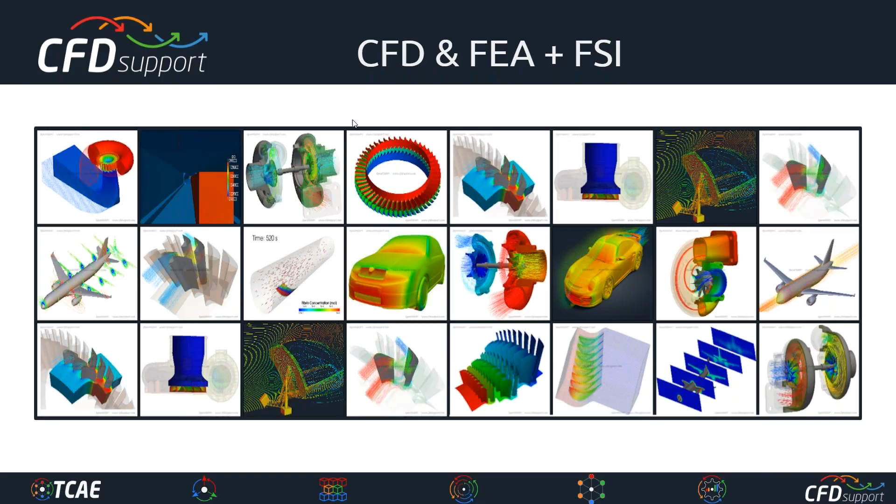Especially we believe in a combination of open source and professional support. So far we have invested more than 30 man-years of focused team development on top of open source to deliver professional simulation tools like this, and that's why we are being picked, and we'll be happy to show you in today's webinar. We have a very strong team of developers, and in TCAE, we have successfully merged the benefits of open source with the benefits of commercial codes. Due to the open source nature of the code, the code is unlimited, it's extremely flexible, and due to the commercial code nature, TCAE has a graphical interface, professional technical support, it's robust, it's accurate, it's automated, it's well tested, and ready for use in the industry.

TCAE consists of software modules that can be combined according to project needs. You can view them as independent standalone tools which together make a complex workflow, but you can use just one of them, all of them, or any combination.

TCAE has a modular character. That means the user can choose between TCAE modules if needed and combine them with many other software pieces available in the market, so the total number of combinations is almost infinite.

TCAE has strong integration ability. It has been developed from the beginning in a way to fit any existing workflow, no matter if it's combined with commercial codes, in-house codes, or another open source code.

TCAE is very flexible because, as you know, in a typical enterprise the engineers usually have an existing workflow already, and TCAE is capable of fitting into it. No matter what design tool or simulation tool is used, TCAE is still here to fit into any workflow and do its job, delivering results for the user's judgment.

TCAE is very flexible. It's ready for very complex workflows, and we believe it's a modern code.

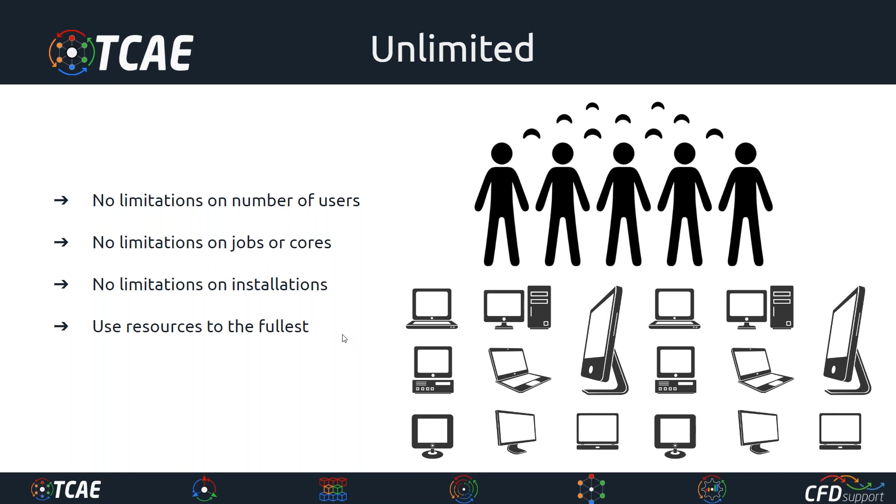TCAE is unlimited. It means there are no limitations on the number of users, and no limitations on the number of jobs and cores it's used with, no matter how many hardware installations are used. It can scale all the resources to the fullest, and it's very accurate.

It's our biggest priority to be accurate, to be focused. It's accurate because it's focused mainly on turbomachinery simulations and external aerodynamics. These are two fields we are focused on in a big way, I would say. It's definitely not a general purpose code, and we believe it's the experience and dedication which makes it accurate.

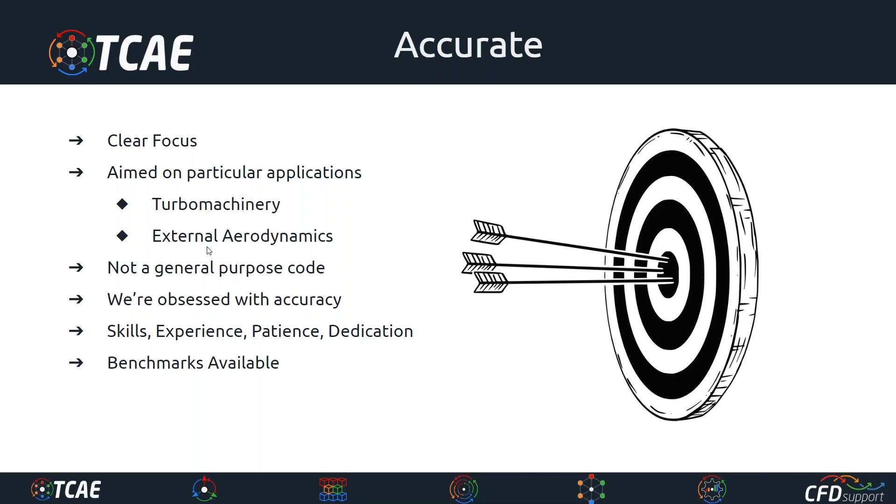It's perfectly automated, so it can be used as a black box or as a fully or highly sophisticated code. We believe we have good technical support.

It's created in parallel for Windows and for Linux, and of course natively compiled, and it can be used remotely or in batch mode.

The automated meshing system is included and available, and of course external meshes can be loaded. It's the user's decision.

There is very advanced post-processing, especially for turbomachinery. We have very good post-processing, a lot of features installed and developed, and we are happy to show you.

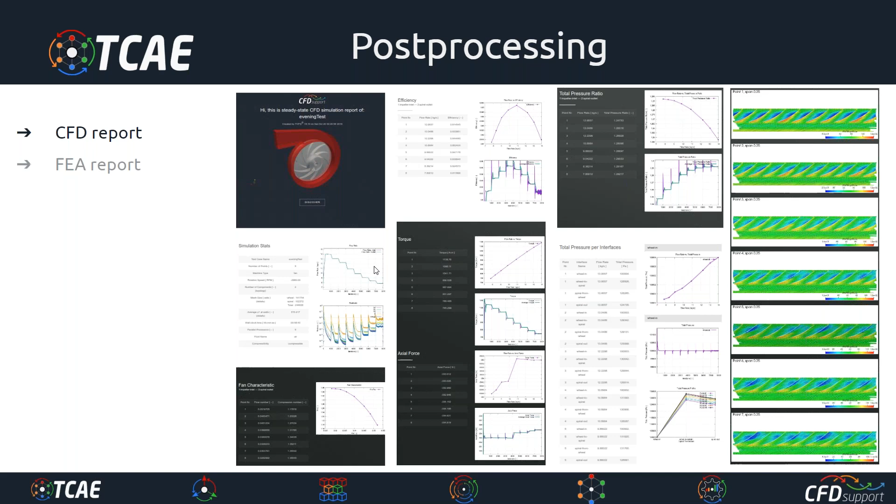We have continual development. As you know, the software is never finished, it's always in the development process. There are a lot of versions we have released, and there are a lot of versions we will release in the future.

It's user driven. The development is based on the users' requirements, which we gather together and pick the most important capabilities to implement for the next releases. We have a special system for the development.

Recently we released the new version in February, so it's not that new, but in February we released version 21.02. We are already in the full process of developing the next new version, which will be released in September. There will be a lot of interesting new capabilities, including again a better graphical interface.

There will be, for example, support for real gases. There will be extended support for heat transfer. There will be a much better CGNS library, export and import. And there will definitely be a big thing, a new module designed for optimization. I'm sure there will be a lot of information released later.

TCAE has always been best for turbomachinery applications like pumps, fans, hydro turbines, as you can see in today's webinar, and compressors, turbochargers, and all rotating equipment. It's also used in combinations of external aerodynamics and rotating machinery, like wind turbines, car bodies, or aircraft, various internal flows like hydraulic valves, exhaust and intake manifolds, ship propellers and hulls, drones, and even building wind loads, human comfort, and heat transfer.

There are a lot of benchmarks we've shown in the past to really prove TCAE is very accurate if it is used in a proper way.

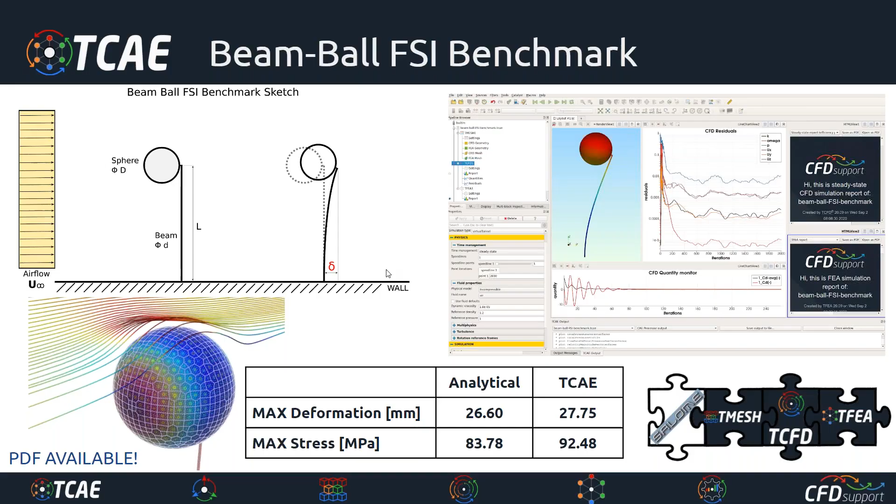Yes, just let me know if you can see my screen. Okay, so when we see it, I will tell you. So we can see it now. So I think you can start your part.

Thank you, Luboš, for handling the presentation. Today I will show you how to set up the Francis hydro turbine case. The case is available on our web pages, in the TCAE section, so you can download it and try it on your own. Today I will basically show you how to prepare a similar case for running CFD and FEA analysis from the existing STLs.

I will directly jump into the case setup. At the beginning we will have just the STLs, which have to be prepared and generated in a proper way. In several past webinars we have mentioned the properties and topology of component thinking, so I won't repeat this. We will directly take these STLs and use them for meshing, and then set up the CFD and FEA simulation.

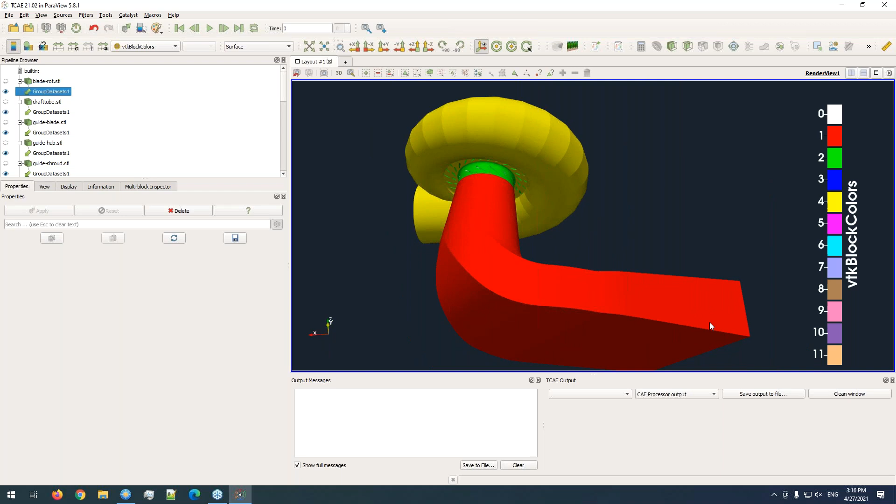This is the simulation domain. It has to be split into meaningful parts, which we call components. Usually we split the components into stator and rotor parts. Here we have at least 3 components: one including the spiral and the guide vanes, then an interface including the rotor part, and then a part which builds the draft tube. Each component needs to be waterproof or watertight—basically a closed domain—and the neighboring STLs fit perfectly between 2 neighboring components.

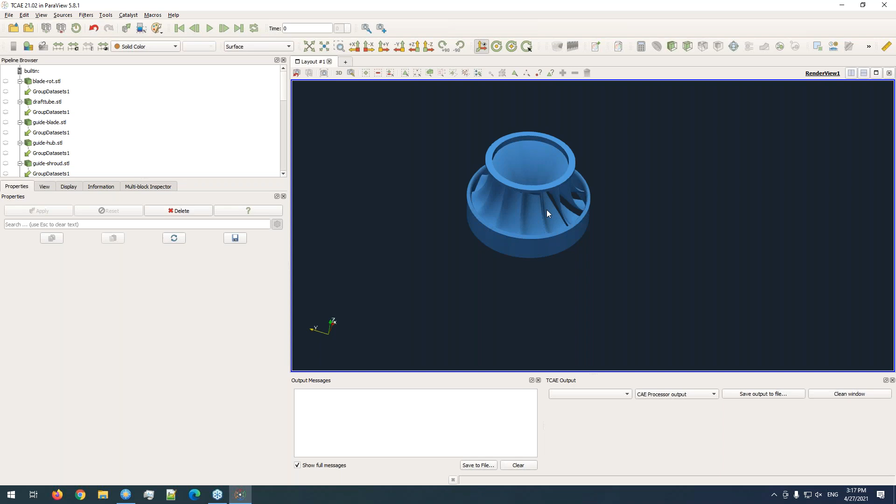If we would like to also do FEA analysis, we need a STL for the solid, which defines the impeller solid itself. So we need one STL for the whole impeller, which will be meshed in the T-mesh module, and then an FEA analysis can be set up for this mesh.

So basically we will be working with this. In general, the splitting of the STLs has to be done in a way that we can then exclusively define the boundaries and boundary conditions. We need to have inlets, outlets, rotating and non-rotating parts. That's basically all the input STLs have to satisfy.

Okay, so let's jump into TCAE. I'm now working in Windows, but a similar approach can be done on Linux machines. I will just click TCAE 21.02—we are using the latest version v2—and let's start.

If we open TCAE, we have the plain setup, and we will start step by step as a wizard, from T-mesh over TCFD setup and TFEA setup. At the moment I will switch off the TCFD and TFEA modules and go for the T-mesh module. First I will set up the CFD mesh, and afterwards I will also add the FEA mesh, then enable again the modules for CFD and FEA analysis.

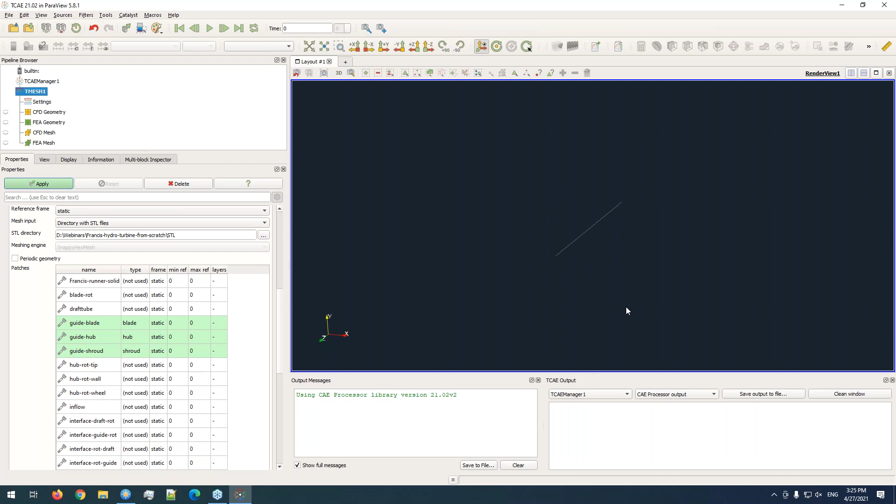Now I would like to see what I have enabled, so I can click apply, and my setup will appear in this render view. So this is my already defined names, defined parts.

And basically we can continue. So this is just hub, shroud, and blades. Then I think there is a part which is called spiral, which is the spiral itself, so I will set it as a standard wall part.

I think there is a little part here which connects the cutwater part and creates one of the blades here, and it is called spiral lip. So I can set it also, for example, as a wall.

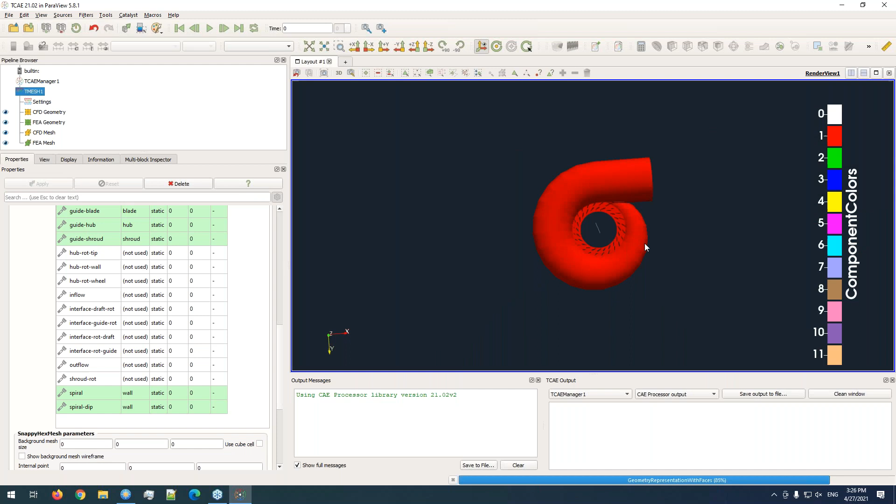And now, if you see it, it is already there. What I like also is that this geometry is saved or visualized by this item within the TMesh module, so you can anytime hide it or unhide it again, or visualize it. What I like is if you click this item and click display, you can make it an opacity to see what is inside.

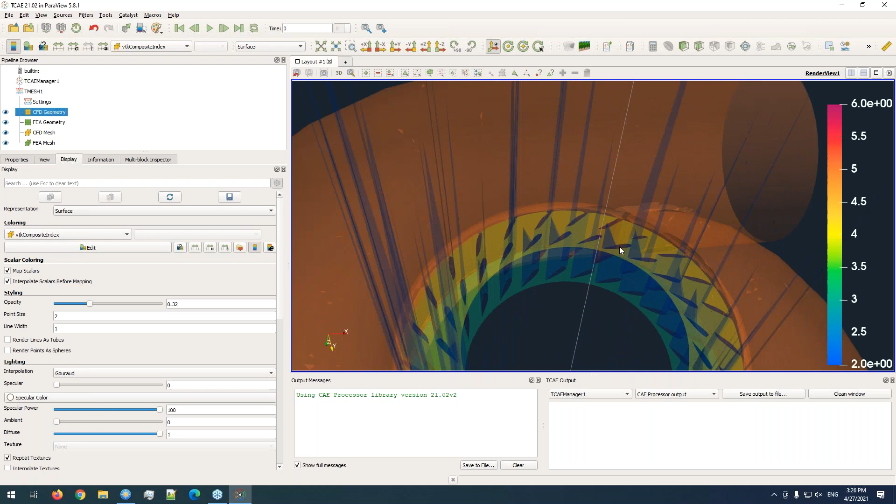The default coloring is that all boundaries owned by one component are colored with the same color. But if you switch to the VTK composite index, each boundary is visualized in a different color. This is also sometimes useful for setting each part.

What's also handy is if you apply a slice on the CFD geometry, you can set the properties in the properties menu. So I will make a slice just in the middle, and basically what you can see now is a contour. You can sometimes check if the contour is closed, which will show you if all the parts are set properly.

So it is also a good visualization for checking the current setup. In the display, you can set the line width to be thicker, which is a nice feature. You can change the coloring to component coloring and so on, so you can combine any ParaView features with the TCAE objects.

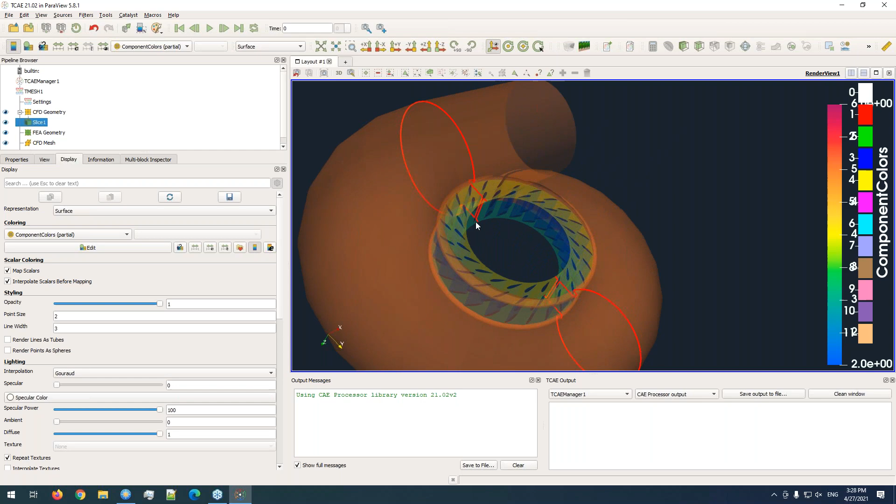What we can see is that the inlet and outlet are still missing, so let's go back and set the inlet. The inflow will be the inlet pressure. Okay, so this is the inlet, and the outlet is missing because it's an interface.

It is named like the interface, and the proper name is interface - this is the guide to rotor. So this will be the interface. There are three types of interfaces: inlet interface, outlet interface for cases where flow direction is known, and free stream interface where we don't know the direction of the flow.

For example, if you simulate an open impeller like a ship propeller, you need to enclose it into a cylinder to define a proper rotational part. On this single interface, because you don't know exactly where the flow goes in and out, you can set it as a free stream interface.

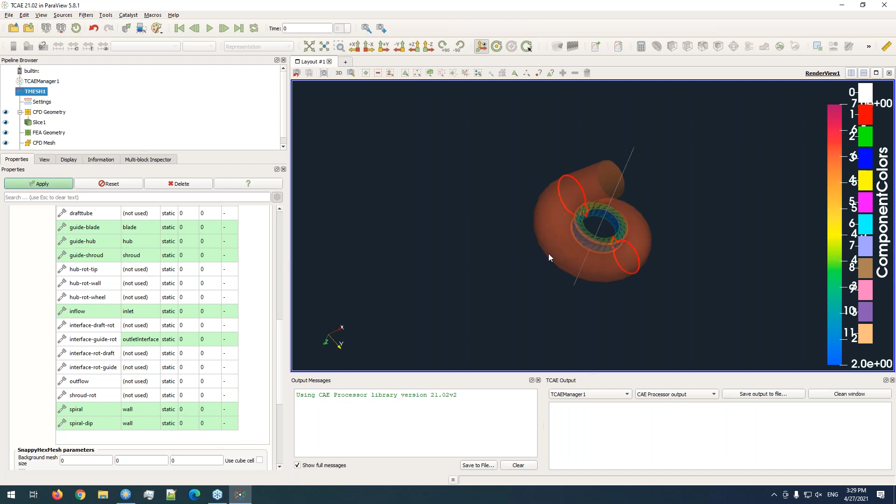But for this case, this is the outlet interface because this part creates the outlet from the guide or from the spiral part. If I enable it, I can see that this contour is closed, and I know that I also defined the inlet. So I think defining or enabling the proper patches is done for this component.

This also needs to be done for component 2 and component 3. So I will go back for the component coloring. Now everything is red, and I will be adding the second component, which is the impeller. I will load the same STL directory and now define the rotating part, the rotor part.

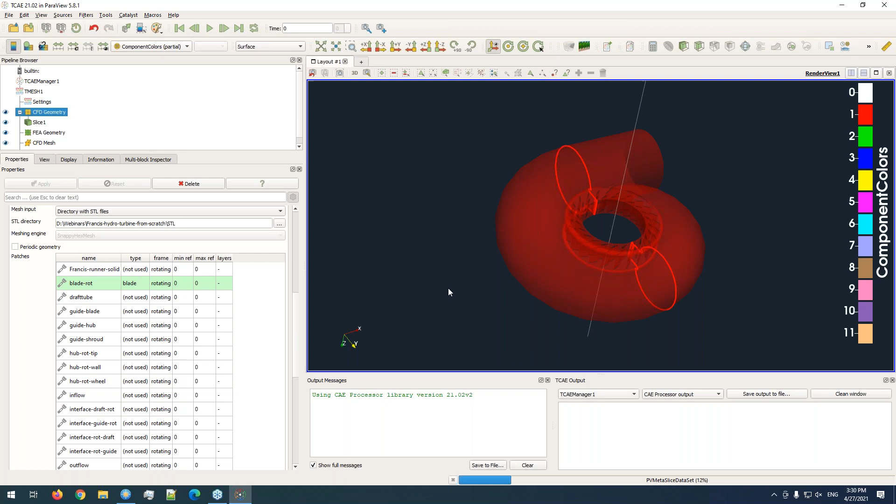Let's start with the blade. Blade rotation, blade rot, is the STL which includes information about the blade. So I will set it as a blade. If I click apply, you can see the blades.

Now is a good moment to mention that it's clever to save the current setup of TCAE onto your disk, to the proper project folder. I will put it into the same folder as the source STLs. So I'll go for webinar, Francis Turbine from scratch, and here I will save, for example, webinar setup.

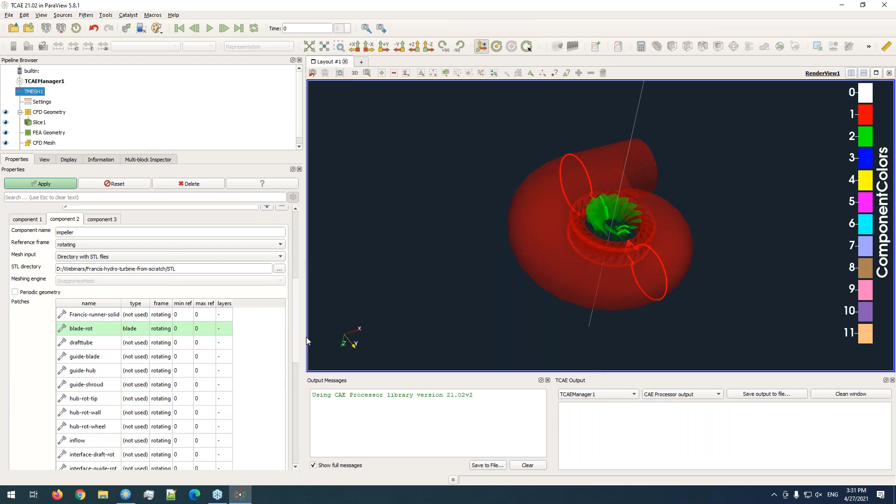Okay, so my current setup is now saved. If I lose something, I can reload my current setup anytime. So let's go to the T-Mesh part again, back, and let's finish the component 2 setup, or defining the boundaries.

So what is the rest? I think the hub is defined as these 3 STLs, so I will enable them as hub types. Setting the hub, apply. Okay, so this was the hub part.

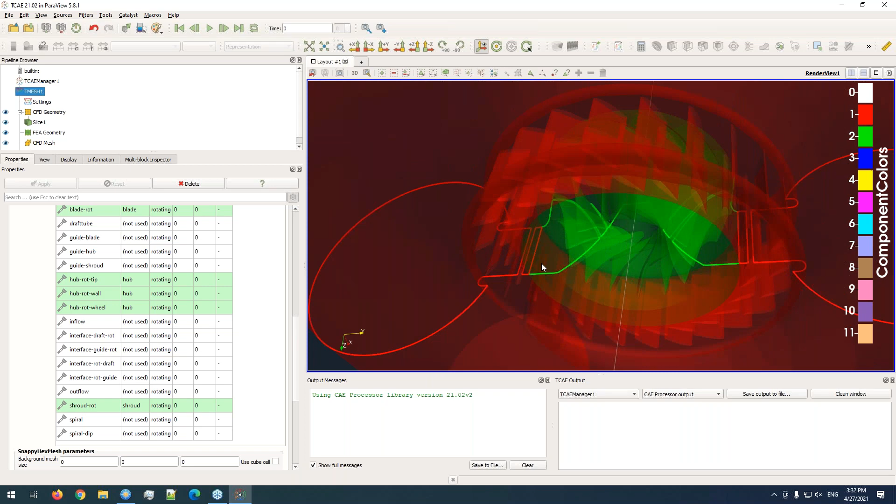I think shroud rotation, shroud rot, is the shroud part. When we focus more, yeah, I think hub and shroud are defined. So I think only two parts are left: the inlet into the rotor and the outlet from the rotor.

So here we have 2 interfaces, rotor to draft and rotor to guide. This is the inlet interface, and rotor to draft is definitely the outlet interface. So let's see if the contour is closed and if we can see all the patches. I think yes, everything is there.

So I think we are safe, yeah, and everything is correctly defined. And the last component, so again, load the STL folder and define the draft tube.

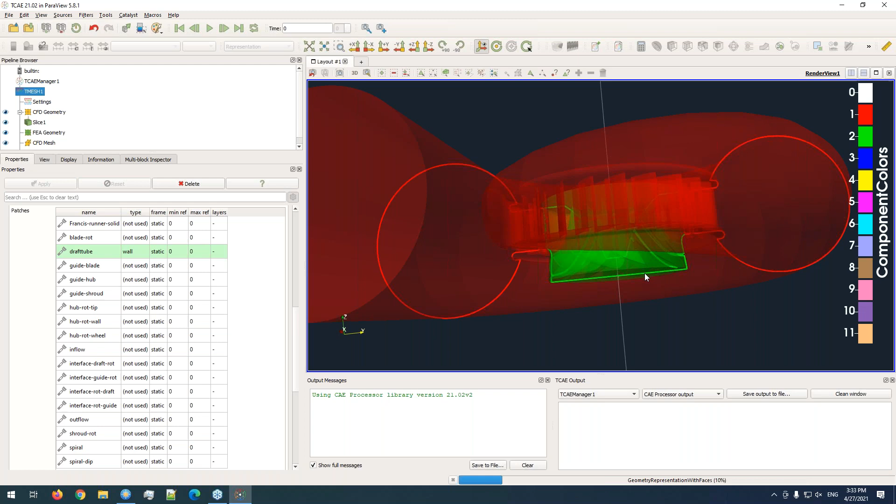So here we have just the draft tube wall, I think, so it will define the draft tube boundary. You can see nicely here, and then only the inlet and outlet. Here we have draft to rotor interface, so here it is an inlet interface, and the outflow is a physical outlet. So there is a simple type outlet to define the outlet.

All right, so here we have, I hope, correctly defined boundaries based on our input STLs. And now we need to set the meshing parameters. So let me save the current setup.

And now we need to set several parameters which define the mesh of the cell, the refinement. For the refinement, there are basically two main parameters: one is the overall cell size for the whole mesh, which is the definition of the largest cell in the domain, and then local refinement for each boundary.

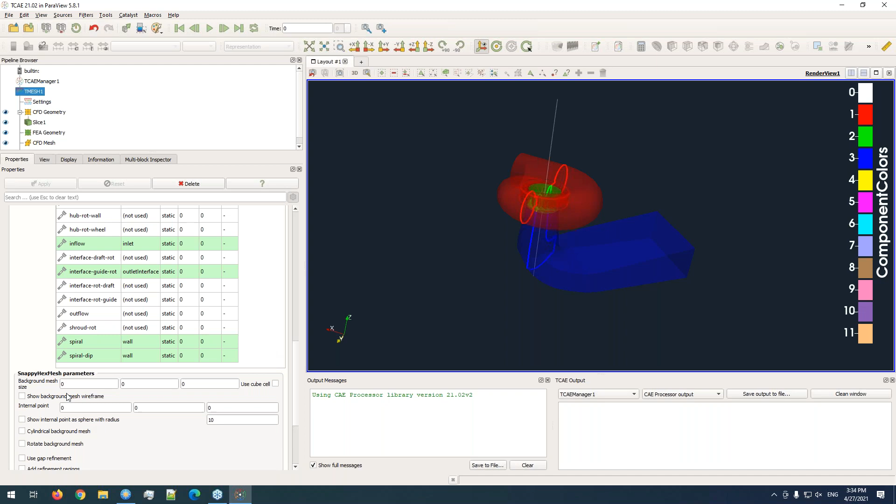So let's start with component 1 to show how it works. Usually you need to find the proper sizing of your cell. For this training purpose, we can go for a rougher mesh. If you start with new geometry, I always start with a rough mesh which nicely meshes your topology, your geometry. And then if everything is fine enough to follow the input geometry, you can start to refine the mesh, adding layers and so on, but only from the state when you are satisfied with the mesh, and then you can start to make the mesh finer.

So usually we start with a cube cell, same size in all directions, and I think a proper size mesh for this current setup, for this geometry, is something like 12 centimeters.

So if you would like to see how it looks, you can enable this show background mesh wireframe. You will see the topology, the sizing of the initial mesh with respect to your component and to your geometry.

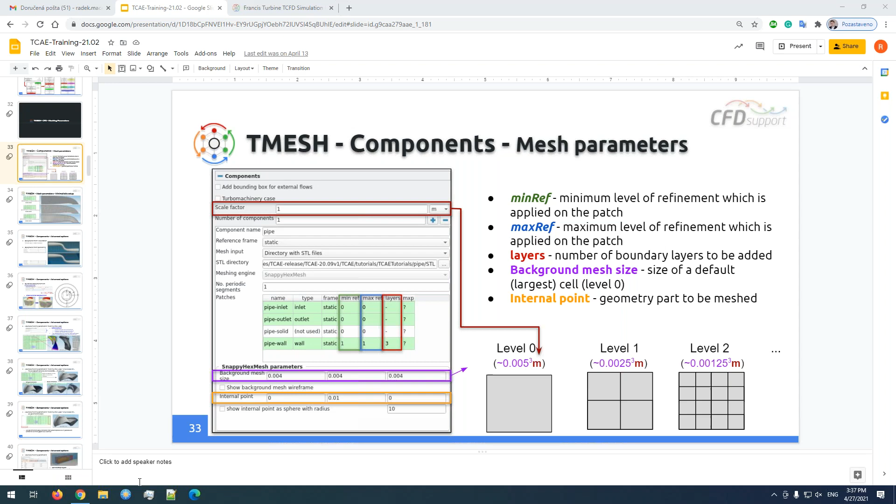All right, so let's go back to our setup. I will keep with this, and then we will define the parameters. So this will be our initial mesh. The internal point is very important, which defines which part of the mesh will be kept.

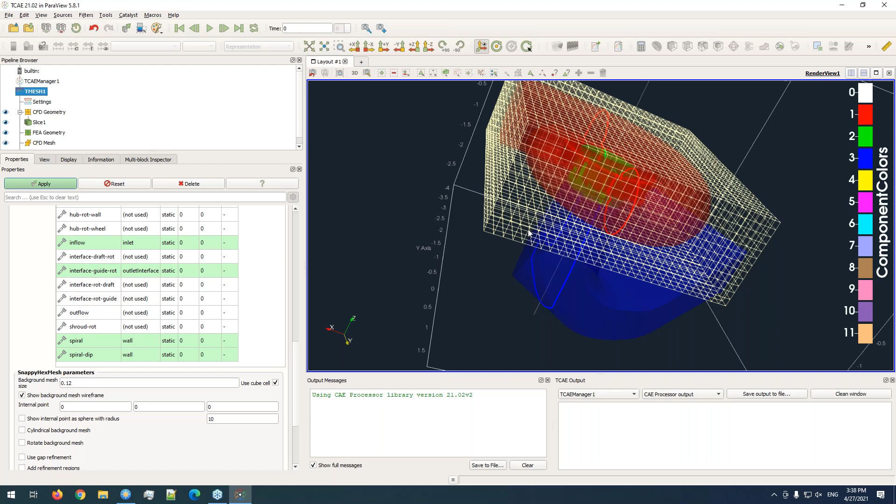So basically, as you can see, you have two options: you can mesh your object from the outside or from the inside. Therefore, you need to set a point within the background mesh which will define the part of the mesh to keep for the simulation or for the finalization of the mesh. So definitely we need to put this point inside.

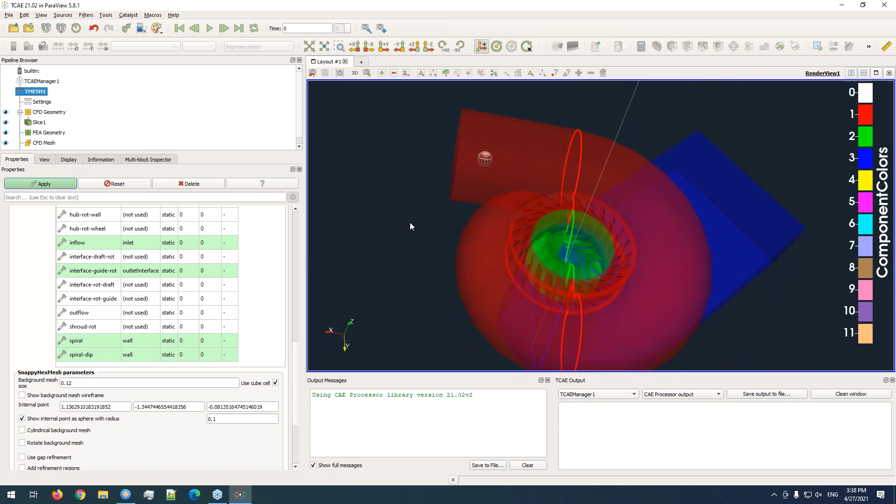So you can enable show internal point and place it manually into the spiral part. This radius is just for the visualization, used just for visualization. So we need to put this point inside the spiral. Okay, now we are satisfied.

And now it's time to set a local refinement. So usually some more detailed part has to be refined more, the important part has to be refined more, and less important, smoother parts can have a lower level of refinement, which is acceptable.

So let's start with an initial guess. Because the blades are pretty detailed compared to our initial background mesh size, I will set the level 3 for blades. Let's say for hub...

You can visualize each part if you double click it. So if I double click the hub, then the hub part is visualized, which is also a nice feature during this mesh setup. Then you can delete this highlighting by this icon.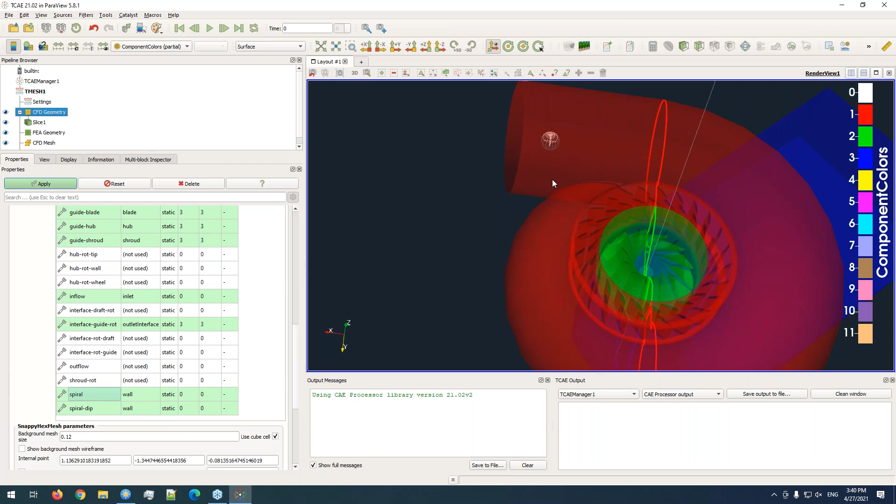The spiral is, I think, the biggest part of this, and it's both smooth but also detailed in this cutwater area. So we can set level 1 for the flat and not so detailed part, and level 3 for the more detailed part. This is done automatically based on the local curvature of the input geometry.

Spiral dip, I think, is the part of the cutwater which somehow creates one of the blades, so I will set the same level 3, 3. Usually if you set the homogeneous refinement, the same levels everywhere, it makes the best mesh, but sometimes it will require a lot of cells. So sometimes you need to set the level of refinement in different numbers for different boundary parts.

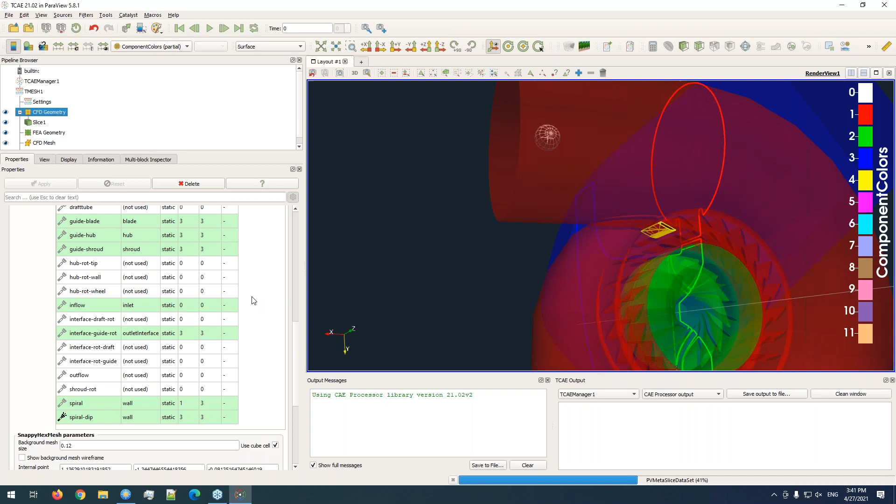Okay, so let's see what we have set. Now we can try to mesh this part. I will save it and click check setup, which is a good button that will show you if something is set correctly or not.

Now we can see an error message: all components of the background mesh size for component 2 must be greater than 0. This check always checks for the whole components, and until now we have set only the first component. So we can see that component 2 has a background mesh size of 0, which is not allowed.

So I will set for now the same sizing for the whole components, for all the components. It is 12 centimeters. Apply, and now I will try it again. Save and check. Okay, all right, very clever button.

I haven't connected the interfaces yet. Now we need to go back - we have defined 3 components and some interfaces, but we didn't define how these components are connected. For example, to see the topology of the mesh, there is a component map. If I double click, I can see it here. So we have 3 components, some with inlet, some with physical outlet, but there is no connection yet defined. This connection is done by clicking on the interface type.

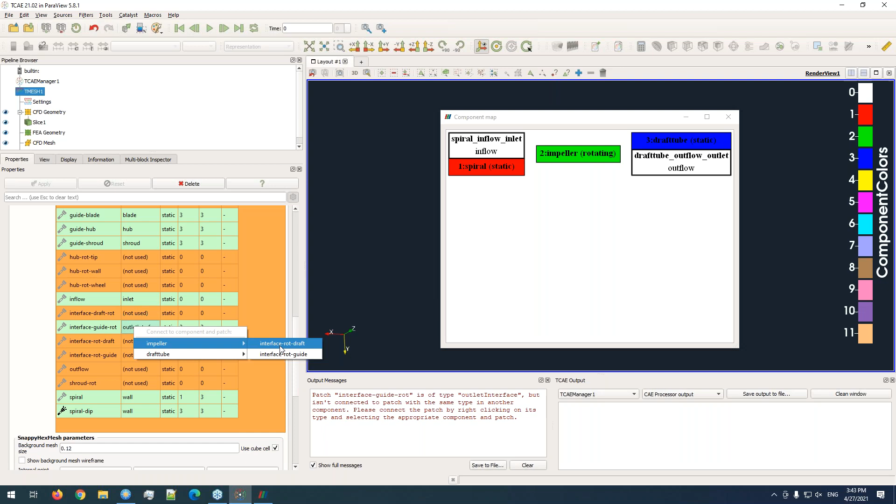If you right click this outlet interface, you have a menu using which you choose the neighboring interface and the neighboring component. So this outlet from the guide or from the spiral part has to be connected to the impeller part, and this connecting interface is rotor to guide, not rotor to draft. If we click it, now we can see a proper connection, and I need to do the same for the second couple of components connected, which is the impeller and draft tube part. So the rotor is connected, the outlet from the rotor is connected to the draft tube.

All right, so this is the connection. Now let me save it, check setup, perfect. Now case setup is okay, and now we can run the meshing for the first component.

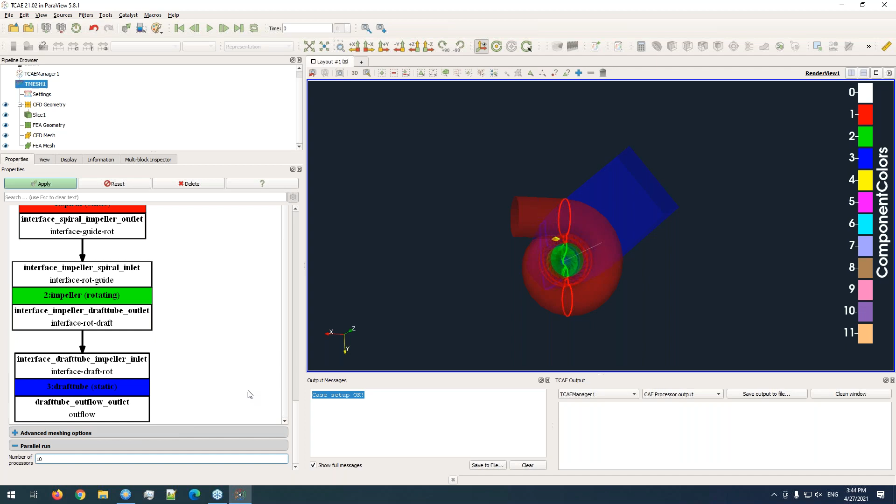Before I do that, I realized that I haven't set a proper number of processors. My computer has 10 processors, so I can use 10 processors for the meshing, which will also speed up the meshing process. So let me set this parameter.

So again, to be sure, I will save it. Now when we are simulating or running something, we need to first define the directory name in which my project or simulation will be stored. So let's say, I don't know, webinar case, for example. Apply. First I need to hit the write button because all the setup and hierarchy of the case is written down. And then I can run the meshing of the first component, the spiral component. So let me click it.

This is the output from the CAE processor, which is running behind, and it is telling you what it is doing at the moment. You can also switch to the solver output itself. So if you are familiar with SnappyHexMesh, then you can see the log of SnappyHexMesh here.

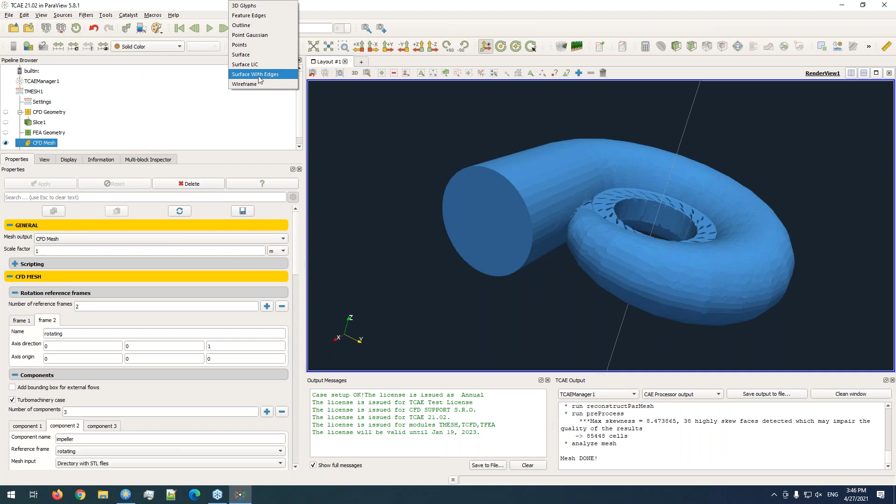So the mesh is done. You can visualize it with this show button. If I click it, the newly generated mesh will appear in the render view. This mesh is stored with this CFD mesh item, so I can get rid of the other items to just visualize the mesh. You can choose surface with edges to see the topology and check if everything is okay.

If we zoom a little bit, we can see there are several errors and flaws. For example, here we can see some cuts or distortion of the mesh. I think this is caused by insufficient refinement on the walls, and also the cells are too large to fully fill the gap between the guide blades and this outlet interface. Similarly, this cut water part also needs a higher level of refinement.

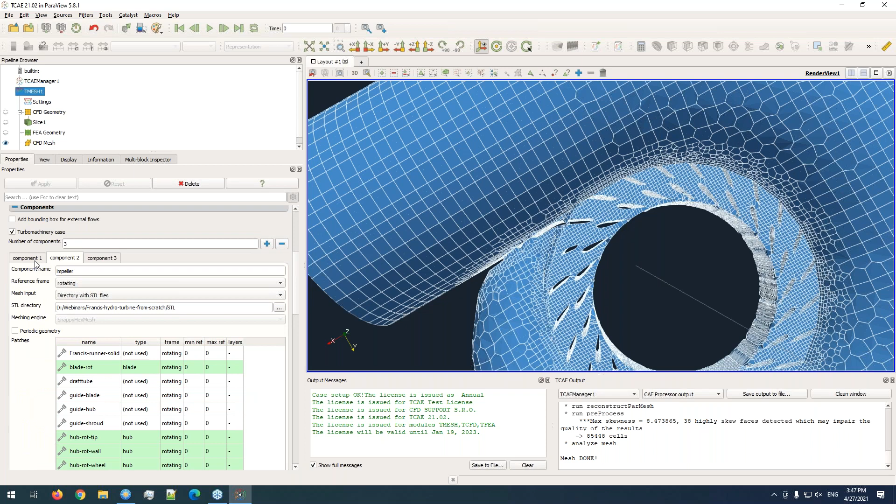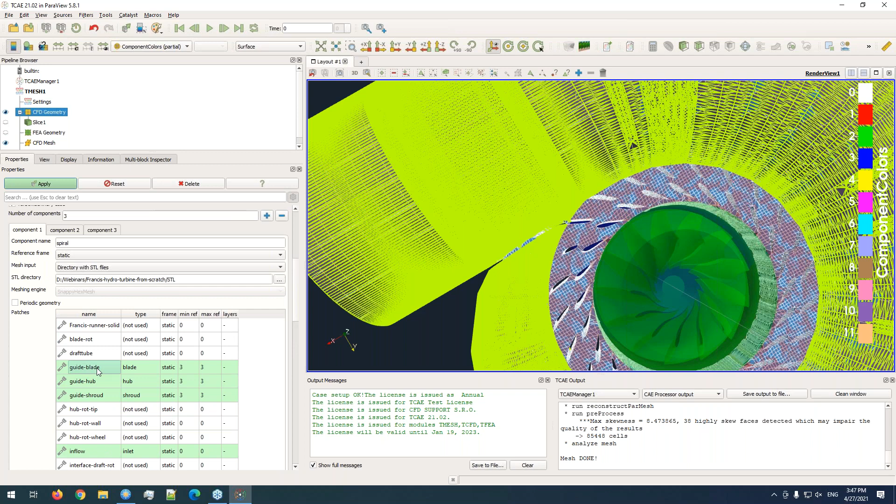So now we can go back to the mesh settings and set a higher level of refinement for these parts. Again, we can visualize this and check which parts need more refinement. Now the spiral dip is highlighted, so it will definitely need a high level of refinement, similar with this part included in the spiral. I set the maximum level of refinement to 4, and the guide blades also need a high level of refinement. To be sure, the topology is also nice on this outlet interface, so it will definitely need a high level of refinement too.

The interface guide rot is this, so I will set level 4.

Now I need to go back to the TCAE manager item. Here I need to write the new parameters to disk, and then I can click build mesh again and check if my second iteration will be better.

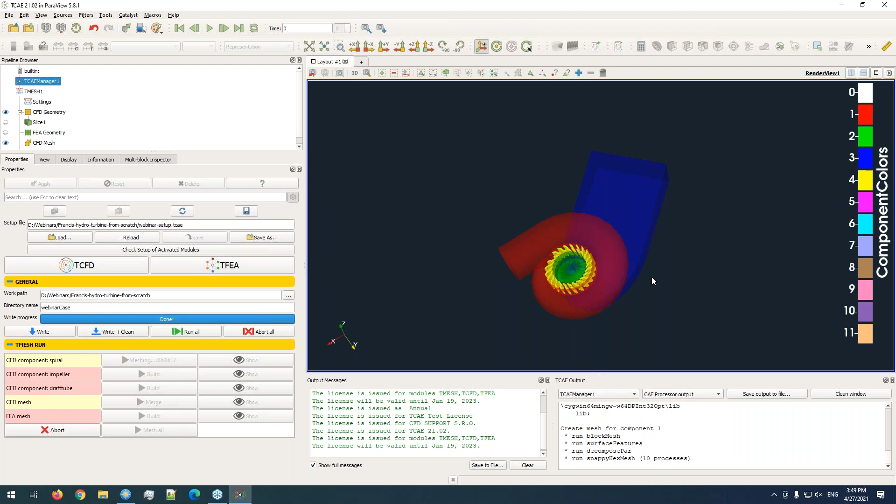This is basically the workflow for setting up new geometry and a new mesh. You always need several iterations to be satisfied with the mesh topology, because for detailed or more complex geometries you really need to play around and locally check and refine all the parts to nicely follow the input geometry. Otherwise, the result will be somehow broken due to bad meshing. So in general, mesh quality from the parameters point of view can be fine, but the mesh itself doesn't follow your original geometry, which will definitely affect the results. This always needs a visual inspection.

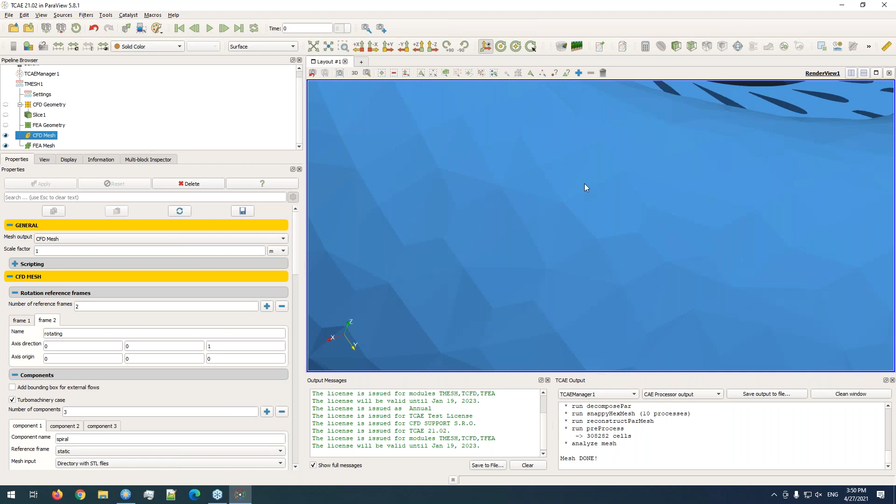Okay, so let me visualize the new mesh again. I will get rid of the other parts, just keeping the CFD mesh. If we zoom here, we can see there are no zigzag shapes, no cuts. So I think for the roughest options, this is a good mesh.

Definitely, once your simulation works, you can start refining everything and check if the results move somewhere, to provide some mesh convergence study. But always start with the roughest possible mesh, because everything then goes fast, and afterwards when the results look okay, you can refine the mesh more and run the simulation again.

All right, so this was the first mesh, or first component. Let's do the same with the second component. I will again visualize the whole geometry, whole topology. Now we are setting the impeller part.

The impeller is the most important part, so it deserves a much finer mesh. You can make the background mesh finer than for other parts which are not so important or complex. So I can make the background mesh half the size of component one, which still holds the proportion between component one and component two.

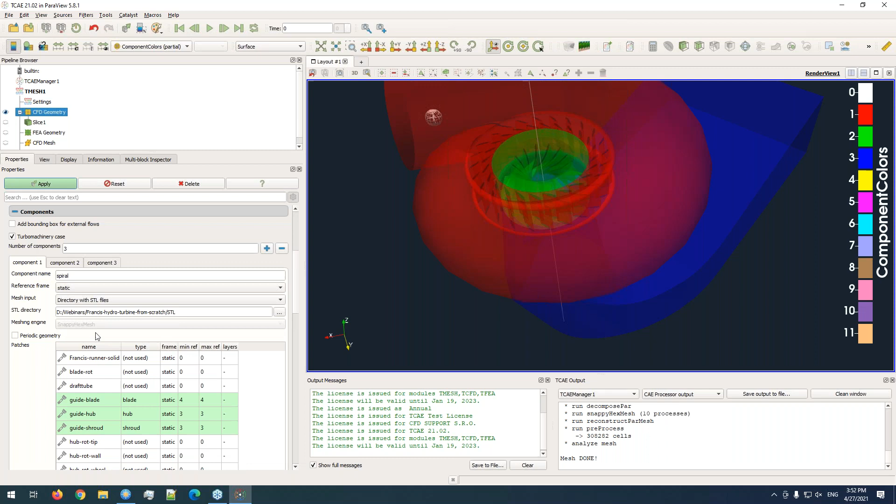I can still keep the same sizing for the interfaces, because if this background mesh size is 0.06 and the first one is 0.12, then for example if my outlet interface is level 4, to keep the same refinement, since interfaces use interpolation during simulation, it's clever to keep the same cell sizing on both sides of the neighboring components. On the inlet interface I can set level 3, and because of my combination of background mesh sizing and level of refinement, it will keep the same mesh sizing on both sides.

Yeah, so it's also a clever setup. Let's set the parameters here. The blade, for example, is the most important part of the whole case. And as you can see, the blades are pretty thin.

So we can, for example, set the minimum level of 2 and the maximum level 4 to better follow the trailing and leading edges.

So for the hub, I will set the same level 2 everywhere, and I think I can keep it also on shroud. And on the outlet interface, which is a nice disk, I think there is enough gap between the lower part of the blades and the interface.

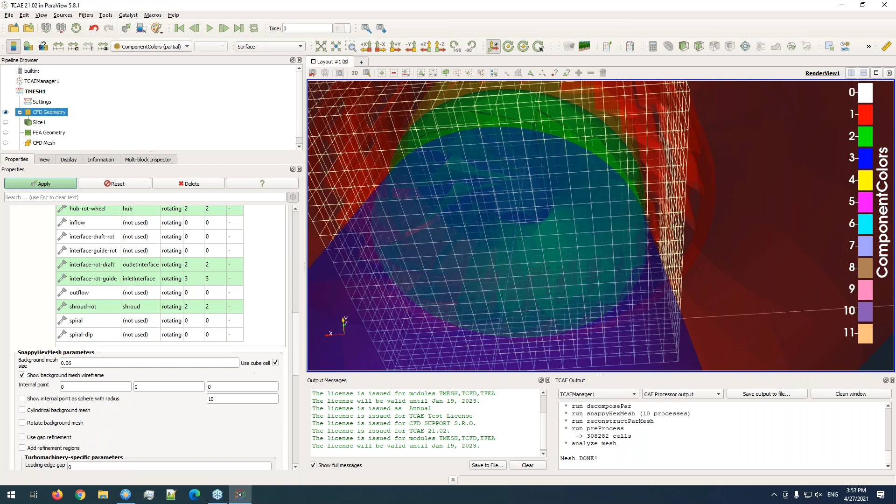I think the level 2 should be okay. The last thing to set at this point is to put the point into the impeller part, so let me find a proper place, somewhere between the blades and inside the impeller. I think this should be okay.

So again, I will apply it, save it, write the case, and run the impeller meshing.

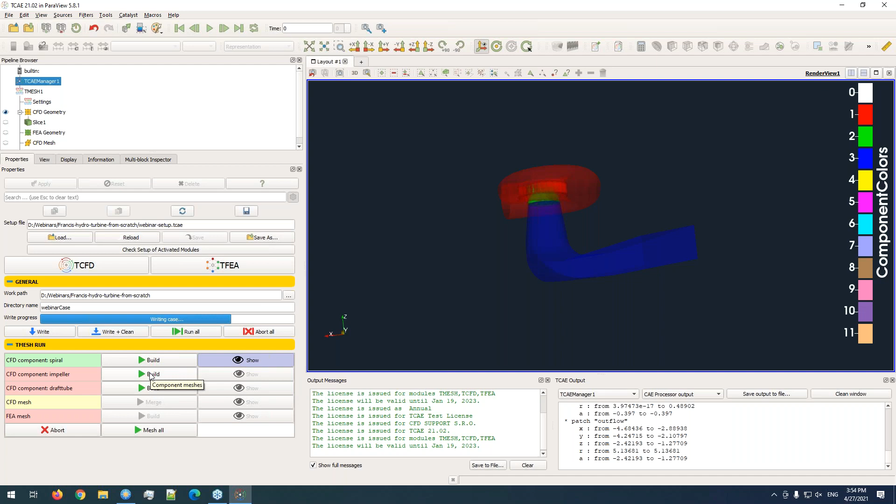Okay, let's build it, and just to fill the time, I will start setting up the last component. The last component is just a draft tube with not much detailed part, so I can keep the rougher background mesh size. The draft tube I will refine to level 1, and maybe some edges to level 2.

This could be okay. Interface - on the impeller side there was level 2, but for the rougher background mesh I will set level 3 to keep the same sizing of the mesh on both sides, and outflow doesn't need a refinement.

And we can put the internal point into the draft tube. So just let me check. Okay, I am in, so let me save it.

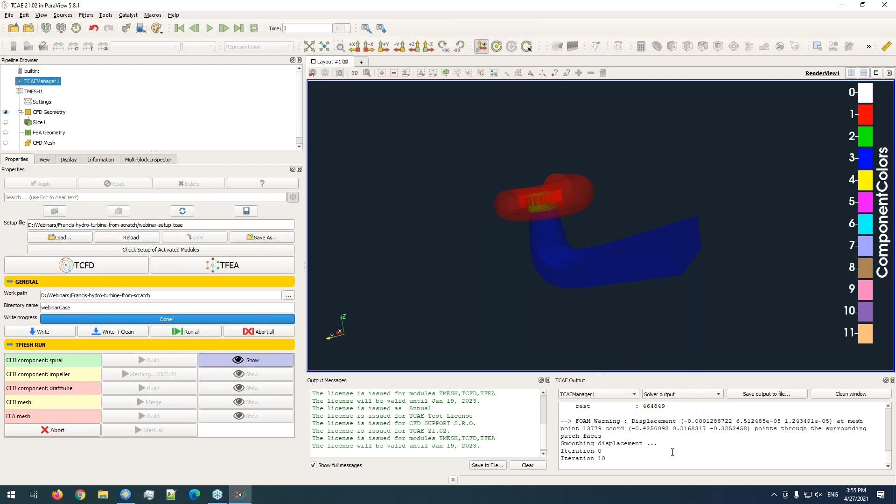Okay, so impeller is still meshing, so maybe we should wait a little bit. Meanwhile, I will fill the time with the improvement of the draft tube mesh, and I will show you a new feature.

So we can see that we have set a pretty rough mesh in the whole draft tube, but for example, what would be clever is to make some refinement in the wake area below the impeller, to better follow all the recirculation.

And so we can set it by the refinement regions. You can use them - this allows you to define a simple shape, like for example cylinders.

So I've aligned it with the axis of rotation, and I will set it somewhere below the impeller. This will allow that all the cells which are inside the cylinder and inside the component, the blue one, and the draft tube, will be refined to the given level.

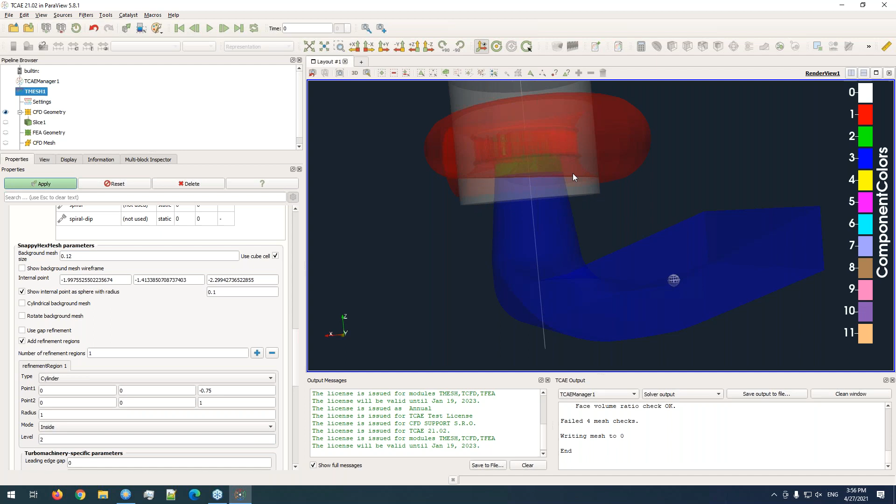So I can set that all cells which are within the cylinder will be split twice, and then I will have a finer mesh in this wake area.

And for example, because I would like to save some cells, I would like to refine other cells which are more below, just to level 1, for example.

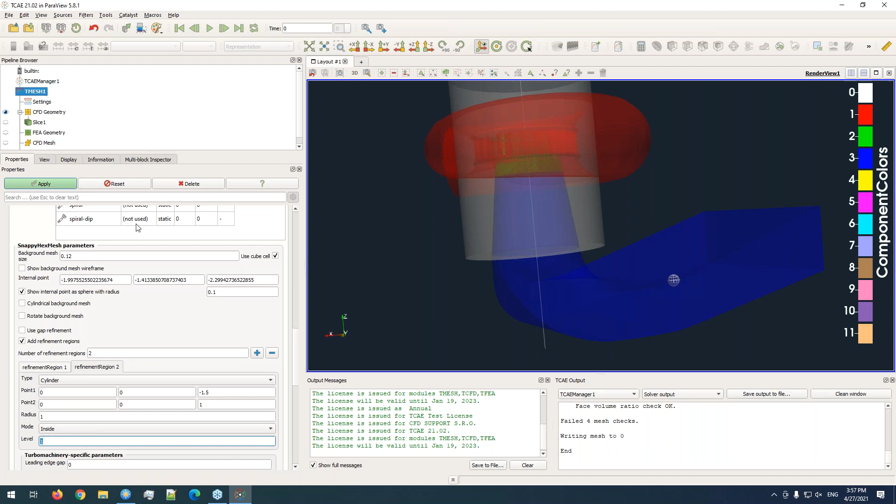So I can define another cylinder, but I will put it lower, and here I will set level 1. So then I will see some gradual refinement from the impeller to the bottom.

Okay, so save. All right. Meanwhile, the impeller is finished, and I will run the draft tube mesh generation, and we can visualize the impeller mesh.

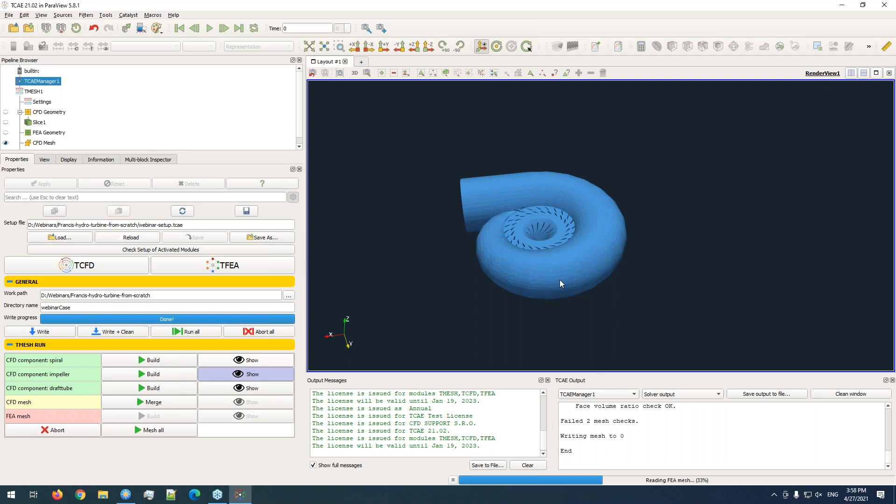So again, I will enable it here. I will show the CFD mesh, and I will hide the CFD geometry, and I can get rid of the spiral part. And this is the mesh for the impeller.

Okay, back here. So I think it's a good start - a very good start for our training purposes. And anytime afterwards, you can refine it more to follow your needs or your goals of the simulation.

And the draft tube, right? I can add the draft tube, which is already finished. And to see what is inside, I can make a slice, for example.

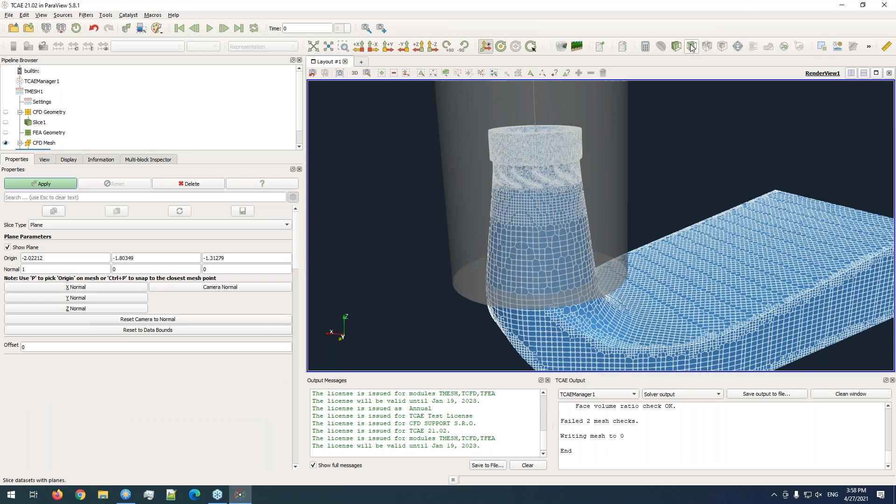So again, on the CFD mesh, I can enable a slice with the proper parameters of the cutting plane. I think to cut it somewhere here, this could be okay. And surface with edges - so now we can see the topology, and we can see the gradual refinement of the mesh. This is, let's say, what I need.

So I think I am very satisfied with this, and I can finish the meshing by the merge button, which puts everything together and creates one mesh which is ready for the simulation.

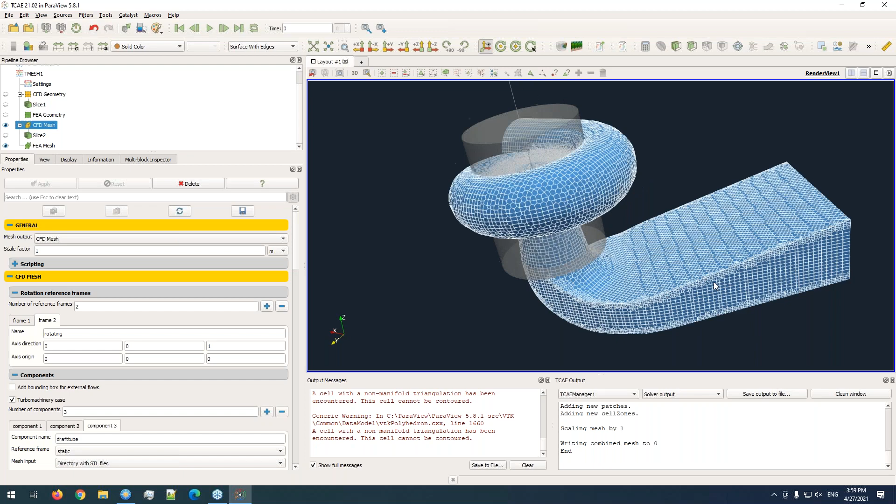Okay, so of course we can visualize the whole mesh just to see how it looks, but we have already checked all the parts there, so I think that this is okay.

All right, now it's time to set a FEA mesh. Because we would like to perform both CFD and FEA simulation, we need both meshes. When I go to the bottom, we can see the new menu for setting the FEA mesh, and this is much simpler. We just need to load the solid STL which defines the solid. You can also use external meshes in NetGen or Abaqus format. Now we need to set just two parameters: the maximum and minimum sizing of the tetrahedra within the mesh for FEA analysis. In this case it's a tetrahedral mesh generated by the NetGen engine.

Okay, let me speed up the settings. Based on the sizing of the impeller, let's set the largest tetrahedron to 5 millimeters, and the smallest one, because the blades are pretty thin, to 1 millimeter. So let's apply it, and I will save it.

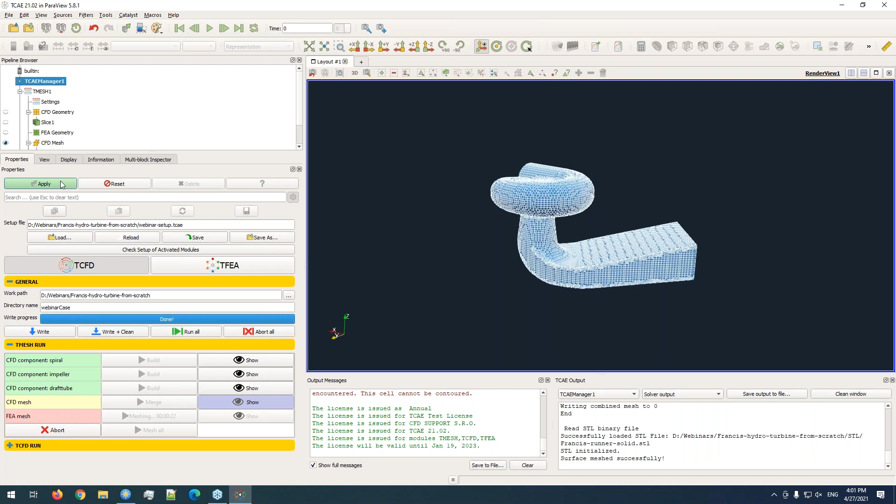So now, when the mesh is ready, we can enable the CFD module, which gives us new items here, some new graphs for watching the instant residuals and the final report. Let's start setting up the CFD simulation.

So there are again several menus. You can go from the top to the bottom like a wizard and set your simulation. Simulation type is the first item to set, pretty easy - you set the type of turbo machinery design you are simulating. Here there's a special type for hydro turbine, which includes specific treatment for the post-processing and the HTML report. It uses specific efficiency formulas and so on. So there are many simulation types for each basic design type from the turbo machinery world.

Inside the physics, we start with time management. Here you can set steady state or transient simulation. We will start with a simpler one, steady state. How many speed lines? Speed lines are simulations with different RPMs, so here we will run just a constant RPM, so we need just one speed line. Speed line points basically hold the different boundary conditions - for hydro turbines, usually we set different flow rates to reveal the performance map. So let's start with three points on the speed line.

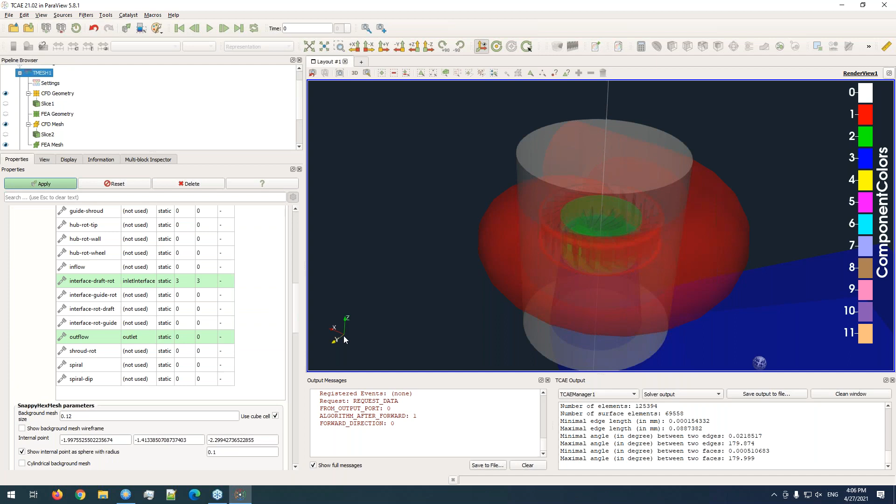Rotating reference frame. Here you define the rotation speed. So if I visualize the CFD geometry again, and if I click the mesh, we can see the axis of rotation.

It follows the plus Z direction. To set the rotation properly, I like RPM units, for example. We can see that it should rotate in this way, and the direction of rotation is defined by the right hand rule, let's say. If your thumb points along the axis, your other fingers point to the positive direction. So this is the positive direction, meaning we need to set a negative value.

I think this turbine operates at 600 RPM, so we set it in this way. It's important to check the sign of the rotation speed, since this could be a common error when setting this parameter.

For the solver, here we can set the number of processors. My computer has 10. There is no limitation.

Numerical order for water turbine, always use second order.

Runtime evaluated quantities. The averaging window is a parameter which makes an averaging, because the instant results can oscillate even if we have a steady state solution. From a numerical point of view, this usually happens for complex geometries, and mainly for turbomachinery, you can always see some oscillation in the solution.

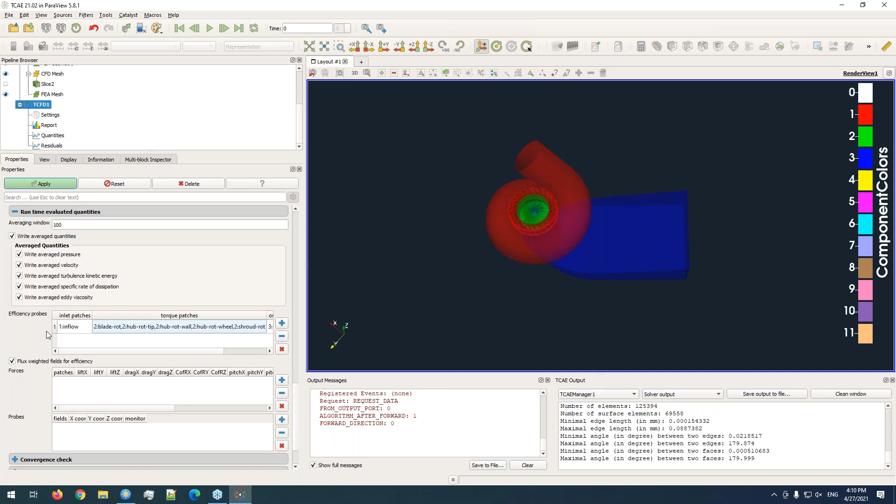This will give you, for example, the efficiency for the whole system, the whole geometry, but you would also like to see the efficiency just for the impeller. So you can set the inflow into this impeller part, torque patches for all parts within the impeller, and the outlet as the outlet from the impeller. Then you will see the efficiency just for the impeller itself, just for the rotor.

You can set or disable the flux weighted fields for efficiency. All boundary or surface quantities are flux averaged by default, and if you disable it, it becomes a simple area average. So usually the flux weighted averaging is standard.

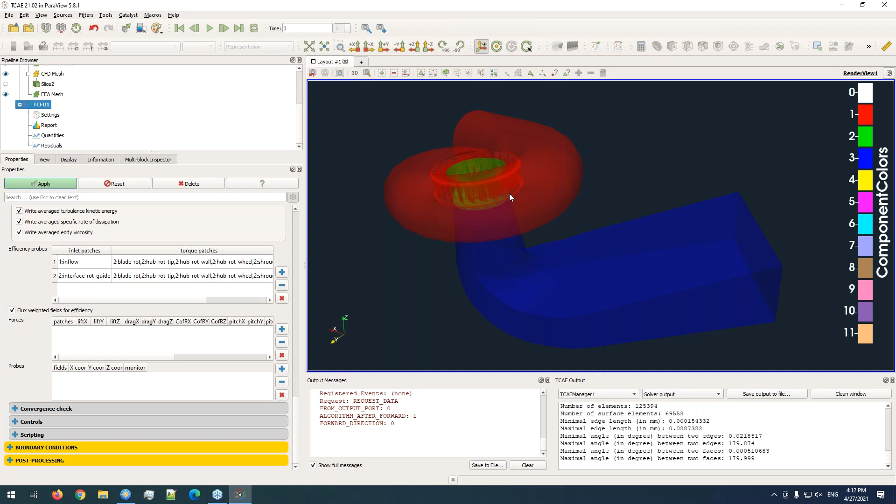You can set the special forces evaluations. For example, if your STLs define each blade individually, then you can evaluate forces on each blade individually by adding a force probe and defining for which part you would like to evaluate the forces or force coefficients. But I think it's not applicable here.

In the probes, you can define an artificial point within your domain for watching instant values of pressure, velocity, relative velocity, and temperature if the solver provides it. This lets you get specific values for a specific point within your simulation domain.

The convergence check here, you set some checking criteria, and if all are satisfied within the simulation, then the simulation is stopped and ended before the maximum iterations are reached. It's a pretty clever way.

Let's say I will use the efficiency probe based on the average efficiency. This criterion says that if the averaged quantity, average efficiency, oscillates less than 0.001% compared to the actual value, then the simulation is stopped. Here you define the relative tolerance, which is always relative to the actual instant value of this quantity.

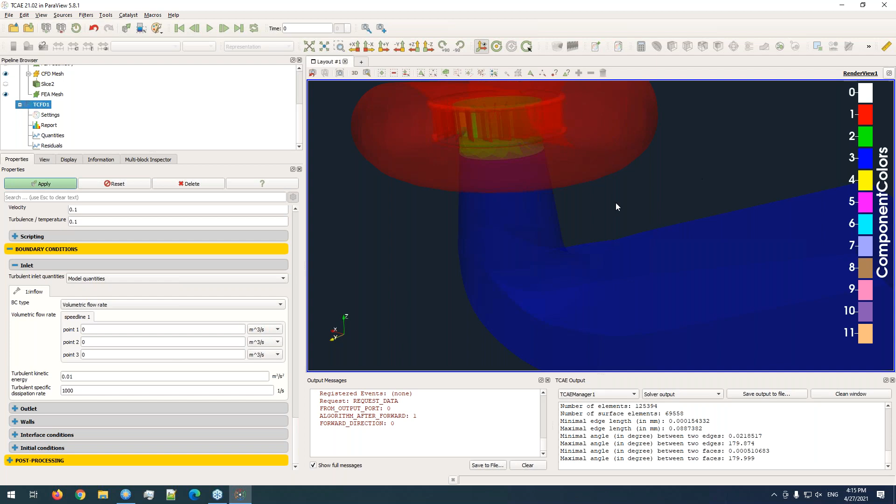I think the design point of this setup is something like 6.5 cubic meters per second. I would like to compute 3 points around the best efficiency point: let's say 7.5, 6.5, and 5.5 cubic meters per second.

Usually it's better to start with the higher flow rates and go to the lower flow rates, from the solver convergence point of view, because it converges smoothly for higher flow rates than for the lower flow rates.

Turbulent inlet quantities can be set here, so you can set the model quantities directly - the particular value of turbulent kinetic energy and specific dissipation rate based on your chosen turbulence model, for example for K omega SST model. Or you can use some helper quantities to evaluate these parameters.

For example, the typical approach could be to use turbulent intensity and hydraulic diameter. Turbulent intensity is in percentage - this corresponds to 5% turbulence intensity, which can be a typical value for internal flows. Hydraulic diameter is typically the diameter of the inlet.

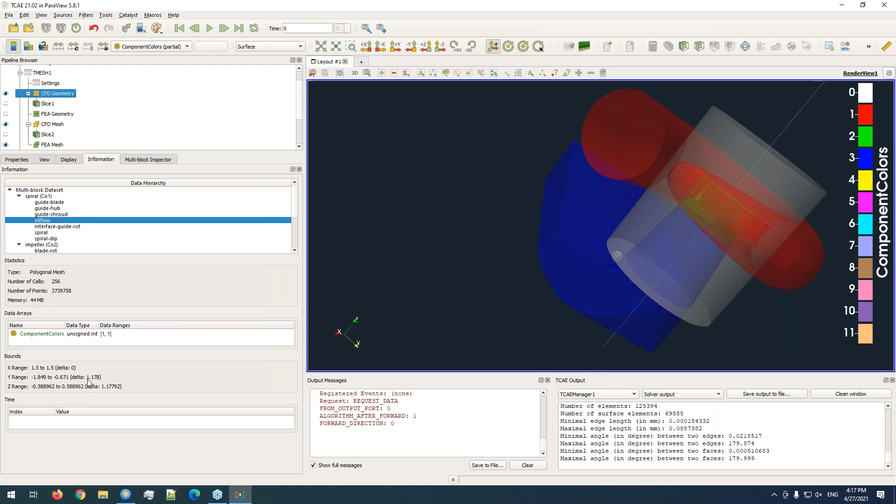In this case, when I go for CFD geometry and go to information, and check the inflow, we have the dimension. In Y and Z dimensions, this shows us the diameter is 1.178, so we can use that here.

So 1.178 meters, and the reference velocity is some usual reference velocity for the best efficiency point, for example. If my hydraulic diameter is this, then the surface could be something like a little bit higher than 1. If I divide it here, it's something like 6 meters per second - just a guess in which range the velocity is at the inlet.

That's all for the inlet boundary conditions. Now at the outlet, typically we use a fixed pressure with 0. For incompressible cases, it's always a relative pressure, and the absolute is computed based on this value to which the reference pressure is added. We are computing the case where the atmospheric pressure boundary condition is set at the outlet - always set 0, it's standard for incompressible simulation to set 0 pressure at the outlet. It's not pressure in pascals, but a relative kinematic pressure.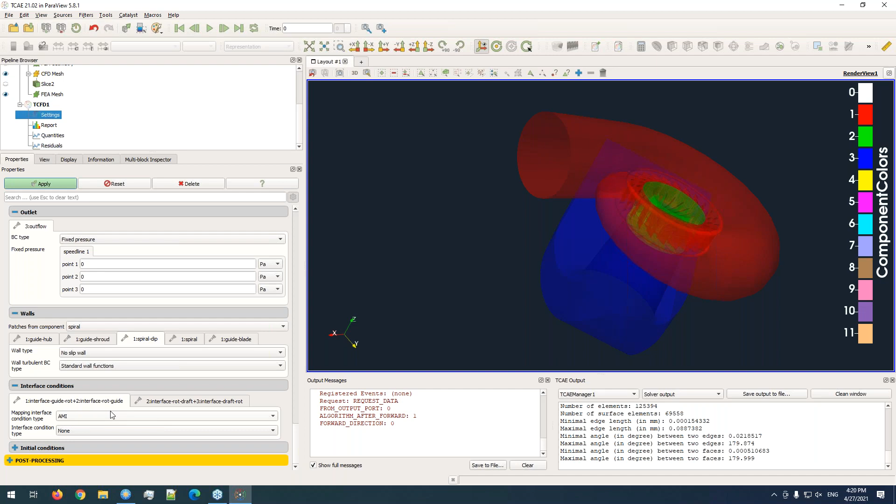For rotational symmetrical cases, where you can expect symmetry in the circumferential direction, you can enable the mixing plane approach. This averages the solution over strips, or rings. For example, you can set 10 rings along the axial direction, and averaging is done to communicate between the two parts. This is typical for axial machines when simulating just a periodic segment, like one blade, since there's no point-to-point correspondence and one side of the interface has a different shape from the other. In this case we can apply both approaches since we expect some symmetrical behavior caused by the symmetrical guide blades, so we can compare results between AMI and the mixing plane approach.

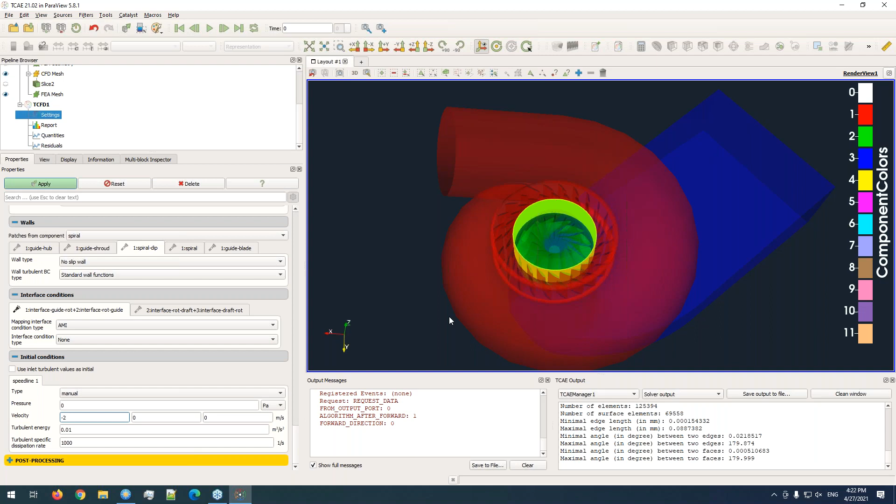For initial conditions, we can set a rough guess with meaningful values. Because the pressure at the outlet is 0, we can keep 0 there. For velocity, we can direct the flow based on the inlet or outlet direction. For example, if this is x, I can set something like -1 or -2 meters per second, since 6 meters per second is at the inlet. For z direction, where flow goes down, we can set something similar, though it doesn't matter much since it usually starts from 0 velocity anyway.

For initial turbulence quantities, since we've already set them at the inlet, we can use the inlet turbulence values as initial conditions, so we don't need to worry about specifying particular values here.

The last part is post-processing. Here you can adjust the report to your needs, set your favorite units, and add additional data files. Usually you can use a resulting file from a previous case, or a data file with measurements, and directly compare them with the current simulation results within the report, which is generated at the end of the simulation.

You can also automatically generate visualizations, like blade-to-blade views and meridional averages, by clicking these plus buttons. Then you choose which mesh to visualize, for example the rotating component. If you properly set the boundary types like hub and shroud, they will be automatically used or checked. This must be set correctly, because the transformation to a hexahedral shape for creating blade-to-blade views depends on the hub and shroud information.

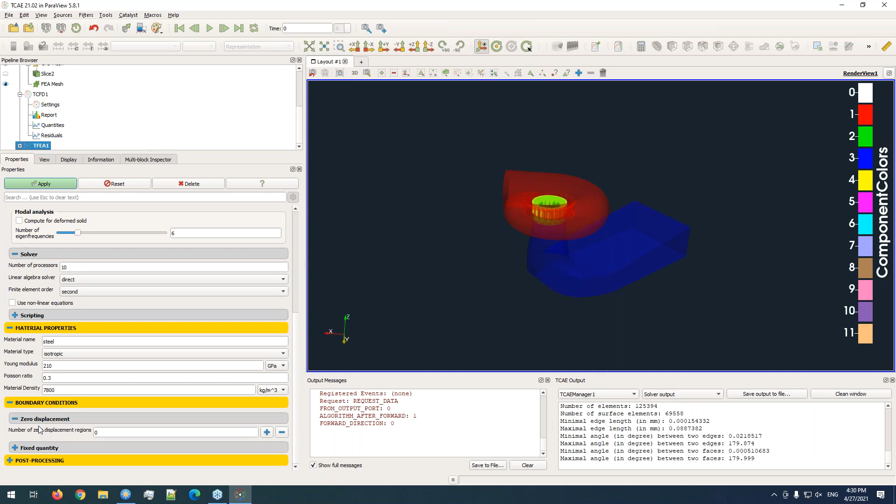So here you need to somehow fix the solid, so where it is attached to some moving part. You can use some artificial shape, or you can use the STL itself. So I can go, for example, for the hub rotor wall, I guess, which we can check.

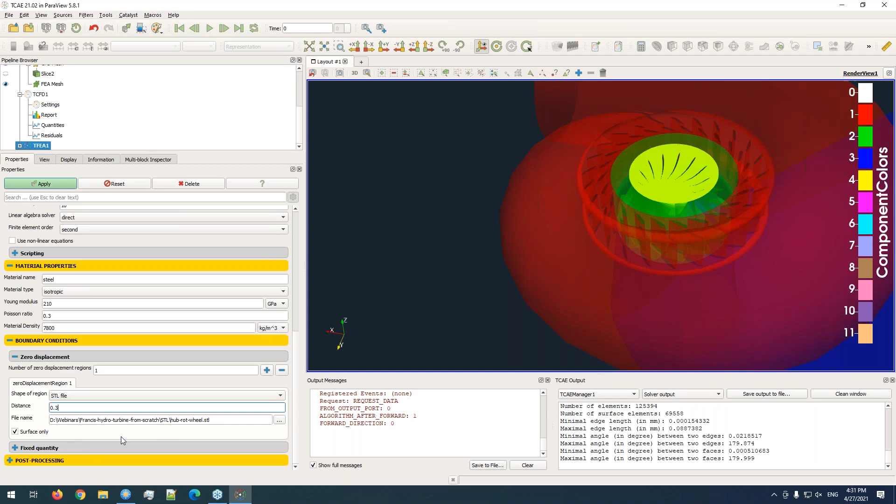If I highlight the hub rotor wall - no, so this is not that one. So hub rotor wheel, yeah. I would like to fix the solid within this STL, so I can choose the hub rotor wheel, and all the points within the solid mesh within a distance from this STL will be fixed. I don't know the proper sizing, maybe 30 centimeters will be okay.

Fixed quantities usually don't apply here, but for example, if you have a simulation including temperature, you can fix the temperature field at the given boundaries. And post-processing, you have two options for units - I will keep stress units to megapascals and displacement unit to millimeters.

All right, and when I am done, okay, check is okay. So I will just merge the mesh, because anytime you hit the right button, the mesh which is ready for CFD is rewritten on the disk, so it must be prepared again.

I need to click the right button because meanwhile, from the last write, I have set up the whole simulation, so I need to write the new parameters on the disk. Now I can click merge, or if you don't want to click step by step, you can click run all, and it will run the whole workflow. But in my situation, I don't want to recompute the mesh, so I will directly run the CFD simulation.

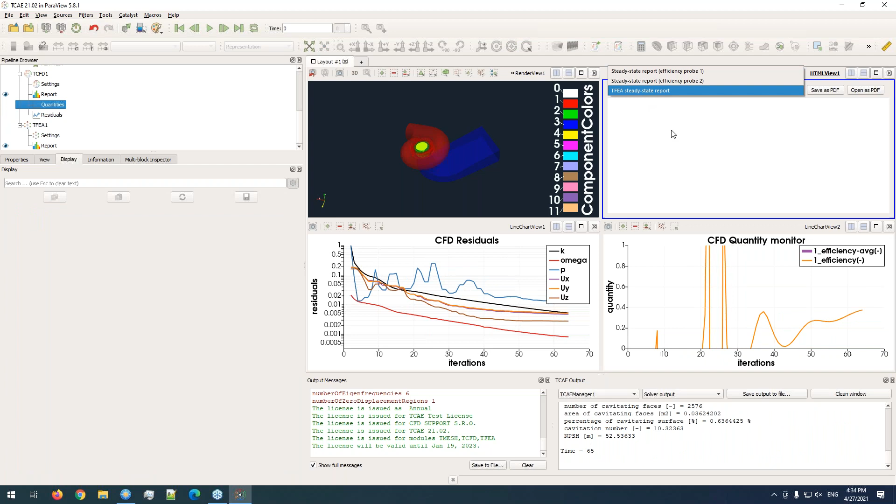At the end of the simulation, when everything is ready, you can see the report here. You can switch between the steady state report, since we've defined two reports, and the FEA reports, and you can also follow them on the disk. I will use my case, which is already computed.

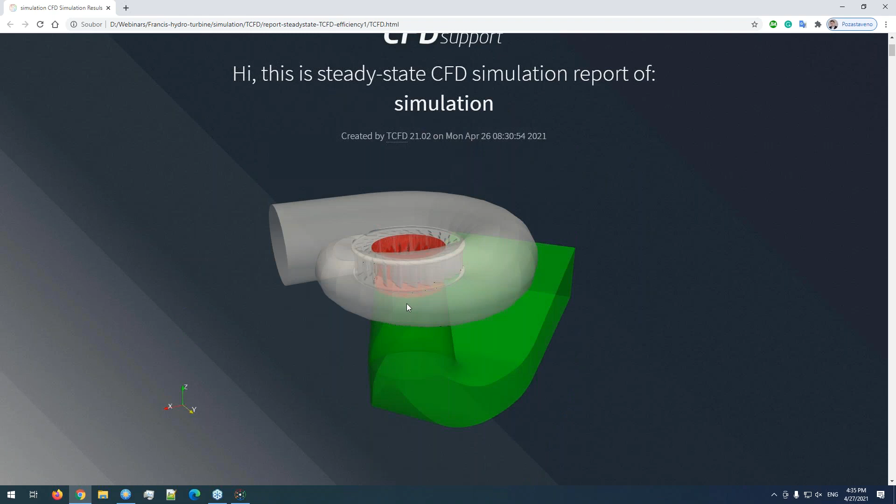I will go into the TCFD, and here the reports are stored within your case. I will open probe 1, which shows us the efficiency and all other quantities for the whole system. This is an automatically generated HTML report.

This simulation was set for 10 points. So here we see the head for 10 points at different flow rates, and similarly for efficiency, so we have a nice efficiency curve.

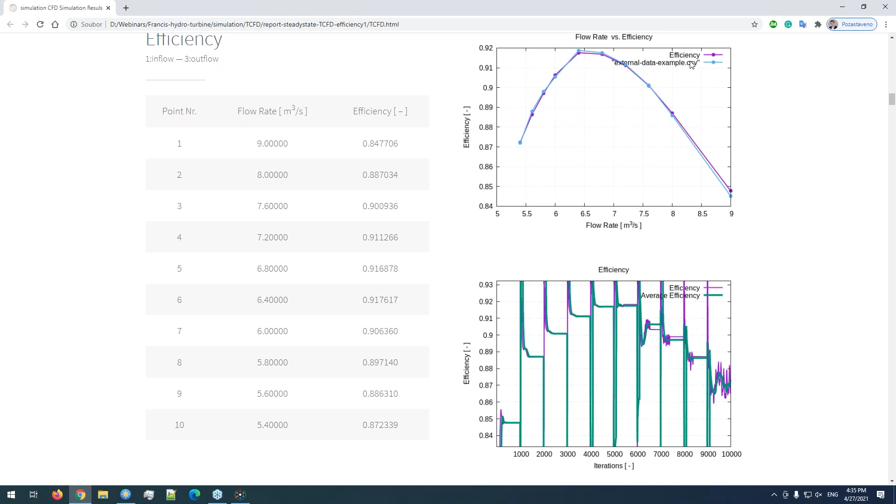Here is an example of how to compare it with different data. The purple one is the current simulation and the blue one is some previous data or measurement, depending on what the user puts as input for this comparison. Torque, axial forces, radial forces, and many other quantities can be watched and viewed here within the HTML report.

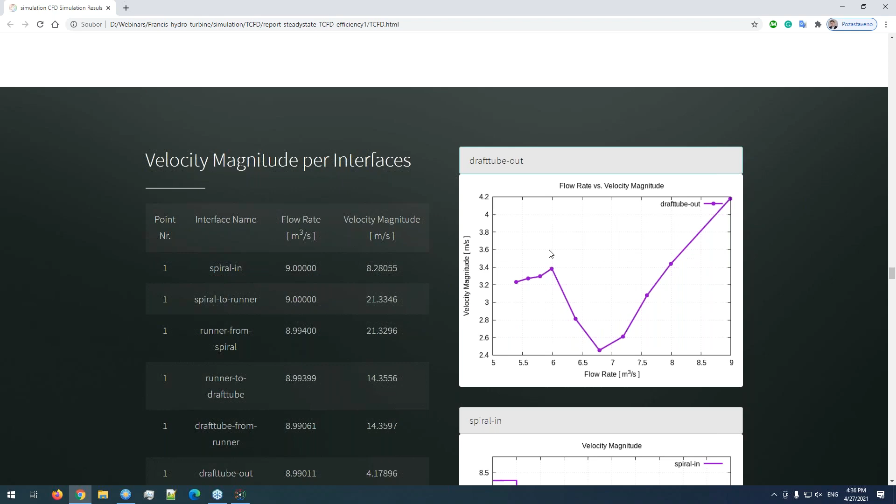The report is also interactive, so you can watch the velocity magnitude per interface. You can choose the interface, for example draft tube outlet, and see the velocity magnitude there for each point and all the other quantities. At the end, you can see the blade-to-blade views, which are generated automatically.

You can see the streamlines on the blade-to-blade view, and similarly, or in the same way, for the meridional average if it's set within the setting. So this is the TCFD setup and TCFD simulation, and the FEA simulation has also its own report.

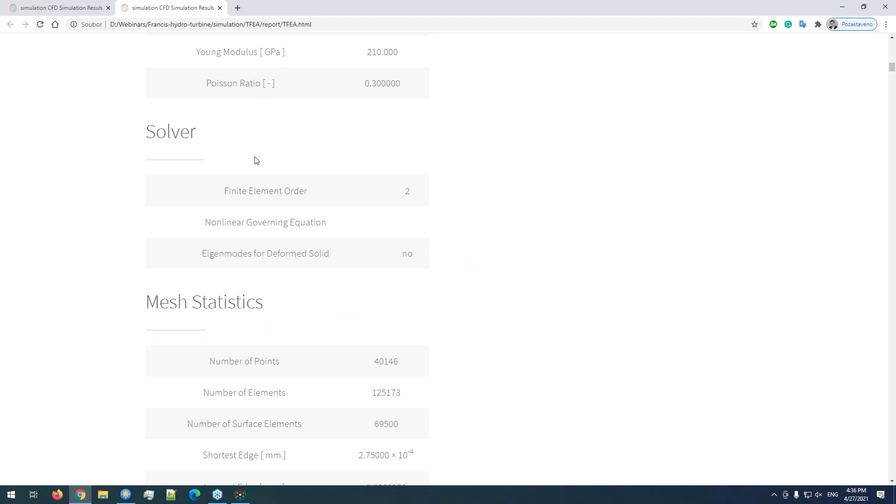Here is the report, and we can open it. The format is very similar: some information about the solver, about the mesh, and some static analysis results like minimum and maximum displacement, frequency analysis, the first three main frequencies for the modal analysis, some displacement and other quantities relevant for the modal analysis.

We have this basically for each simulated point, because we have 10 points, so 10 FEA analyses. The results can be anytime visualized.

If I open the already simulated case, I can open it here. You can directly open the results from the manager. Let me just load the previous results, and you can anytime visualize the results for some manual post-processing.

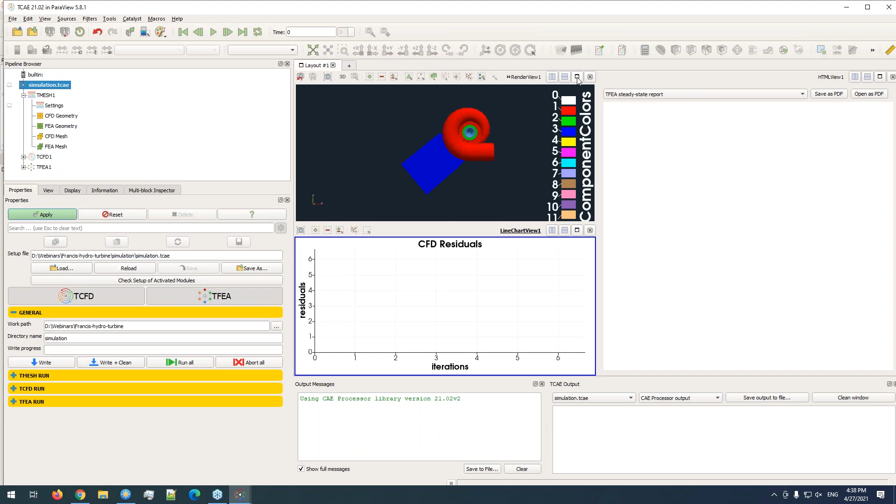You can use any features which ParaView has together with our filters for the blade-to-blade view and meridional average. I will hit the apply button, and for example, we can show the FEA analysis results. If you go to the FEA run, you can click here to show FEA results, and then a new item will appear here.

You can get rid of all of this. This is the FEA mesh, and on this mesh, if I go to the first point, for example... all right, I'm not sure if I opened it correctly, let me do that again. Oh no, this is the mesh, sorry, so I think it's this file.

Okay, maybe I'm not sure if this simulation was finished, or if I copied it correctly from my computer, but definitely in this way you can nicely visualize the results.

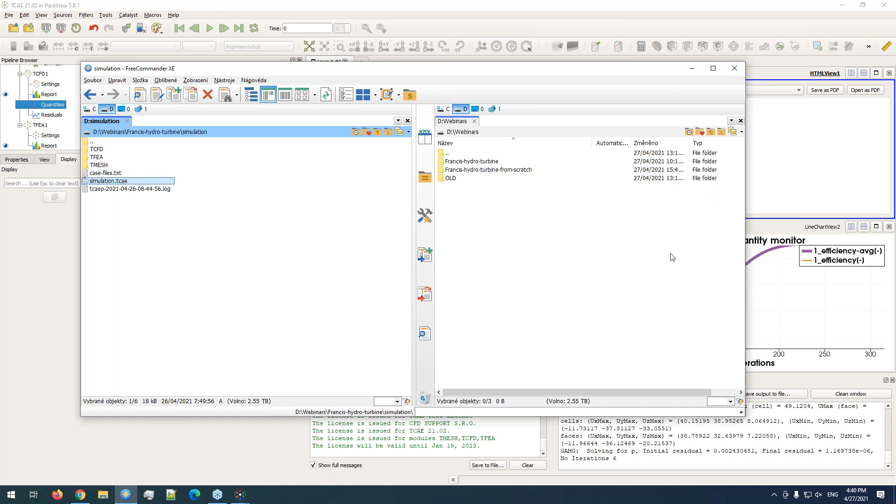Similarly with the CFD simulation, you can just hit show CFD results and visualize, do tricks like slices, streamlines, clips, and so on. I think this could be shown in some next webinars, some custom visualization and so on. My time is already up, more than 1.5 hours of webinar time. So what I've presented is how to quickly set up the CFD simulation from scratch, from the input STLs, and within 1 hour we're able to set up the whole simulation and play with it.

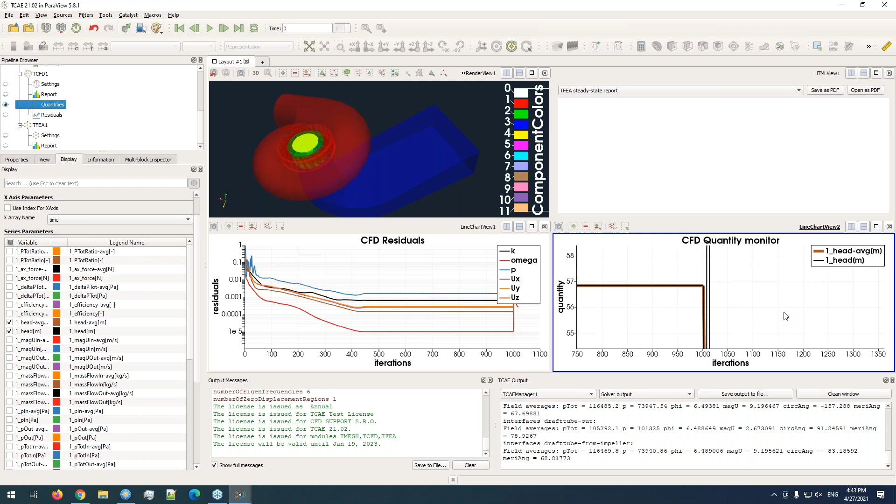I hope eventually you would see my screen. Radek, please tell me when you see it. I think it's now in the switching phase. Sometimes it's slow, I'll tell you when I see it. Okay, but anyway, we can talk - so the webinar is over, we would like to thank you for coming.